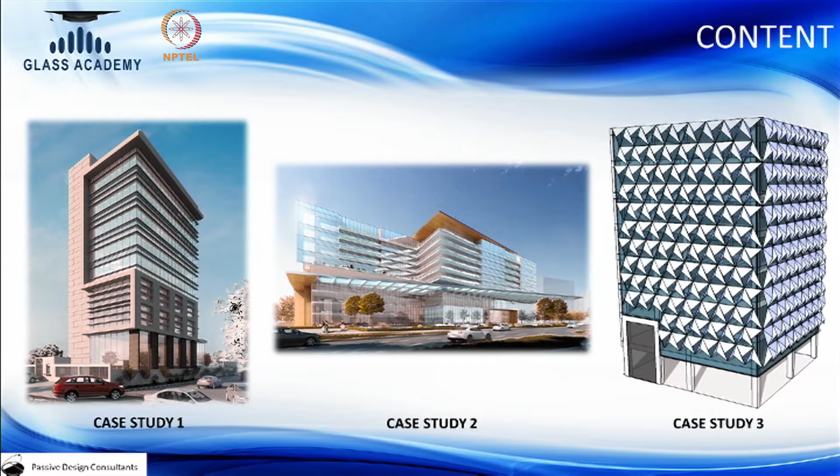Today, I'll be covering 3 case studies primarily. All these 3 case studies are from Delhi NCR region and they are commercial buildings. So, our topic is case studies on high performance building envelope for sustainable building design. And to introduce you to our approach, we begin our studies with first our understanding of the climate, identify passive and active strategies suitable in that climate, going ahead with building daylight integration.

As we are talking about facade, the facade basically has 2 main components, walls and windows. So, the windows have to be optimized for multiple reasons. One is introduction of daylight in interiors of the building. Second is views for the occupants from within the building to the outside. And third, we don't want glare, or we want minimal glare for the occupants, so work can be done comfortably. And in this regard, we also want to make the building more energy efficient.

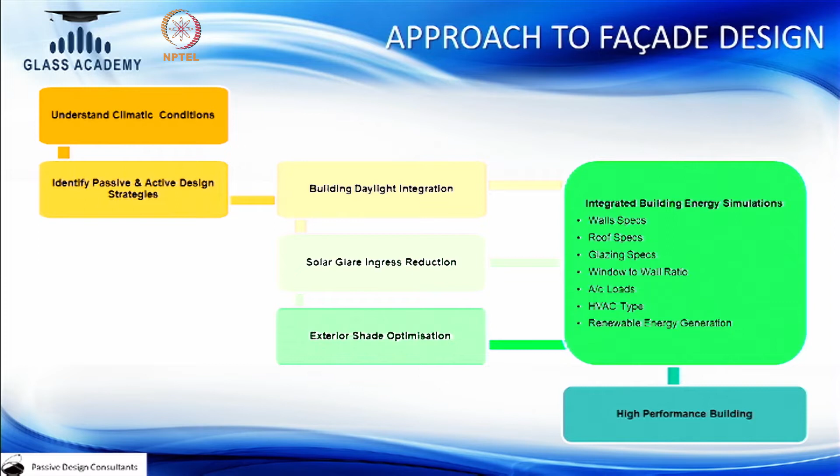So, in order to conduct that, we integrate building daylight with solar glare ingress reduction in the building and exterior shade optimization. All these 3 happen along with integration of building energy simulations for the project, so that we have an integrated design approach. We allow maximum or optimized daylight while preventing glare, having well shaded facades so that the building has minimal energy consumption and it performs well to deliver a high performance building.

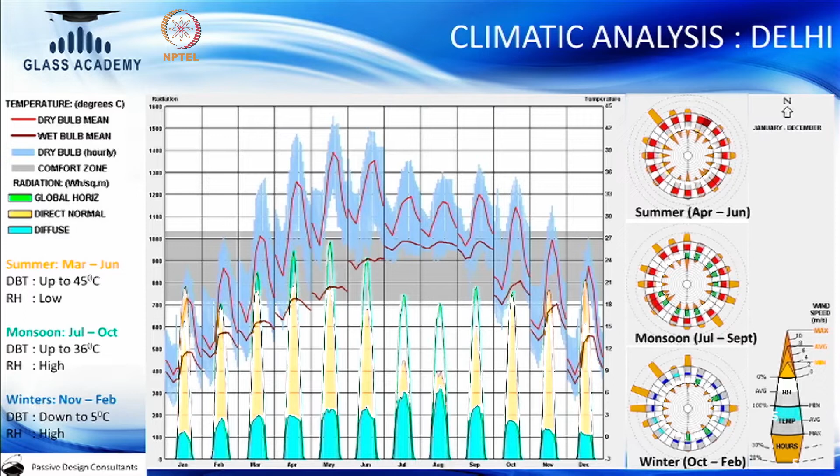To begin with, for these 3 case studies, I'll introduce you to the climate of Delhi. Delhi is primarily a composite climate. We experience all different kinds of climates, like extreme summer where the temperature goes almost up to 45 degrees, monsoon where it gets very humid and the temperature is generally up to 36 degrees, and very cold winters where the temperature drops down to almost 5 degrees Celsius with high relative humidity. Generally, in Delhi, the wind is primarily from northwest. However, during monsoon period, we also get wind from southeast.

Looking at possible active and passive strategies, we derive it through psychrometric analysis. Only approximately 9% period is thermally comfortable by the nature of the climate. For the remaining period, we need certain interventions in building and primarily in building facade, so that the buildings can be made energy efficient as well as comfortable for occupants. So, the major strategies which have been identified for this kind of climate are solar shading, which is applicable for approximately 63% period.

2-stage evaporative cooling, which also helps you for almost 18% period. Thermal mass and night ventilation, which is applicable for 18% period. Mechanical ventilation further enhances thermal comfort for approximately 8% period. And for the remaining approximately 50% period, we do need air conditioning specifically for commercial buildings to make occupants in those buildings comfortable.

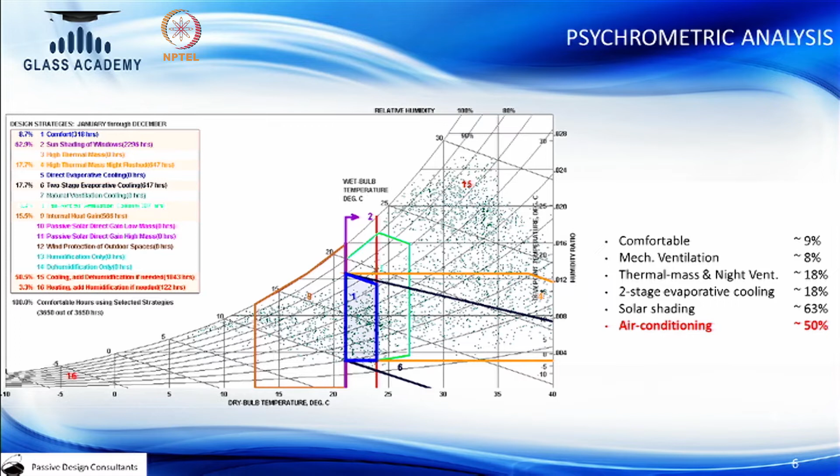To begin with the first case study, this case study is a commercial building which is core and shell, which means that the client was only interested in making the building facade and the core of the building. Remaining things will not be developed or provided by him in the building. A tenant will come and will occupy the space and will install the remaining items. The building is aspiring to platinum IGBC Green New Building rating system. The building is approximately 1700 square meter in total built up area, and has ground plus 7 floors with 1 basement.

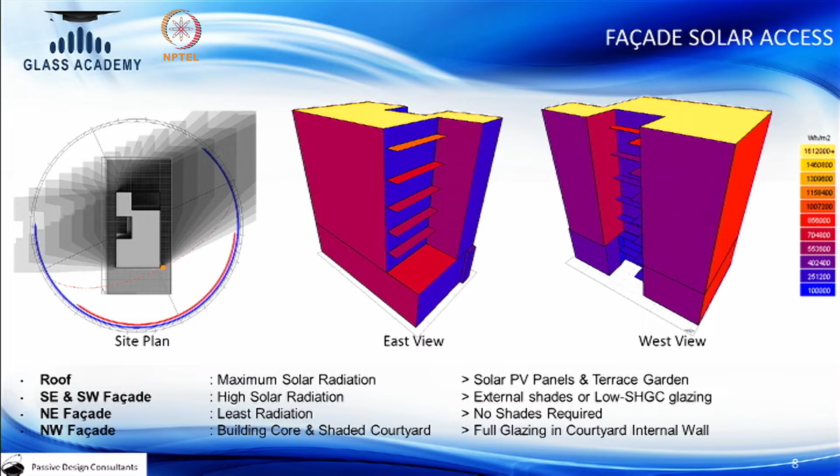On the northwest facade, the building was basically facing the adjacent plot and the adjacent building. So, primarily it was blank, but there is a courtyard facing that direction in the project, and that particular facade, since the courtyard is shaded, could have full glazing.

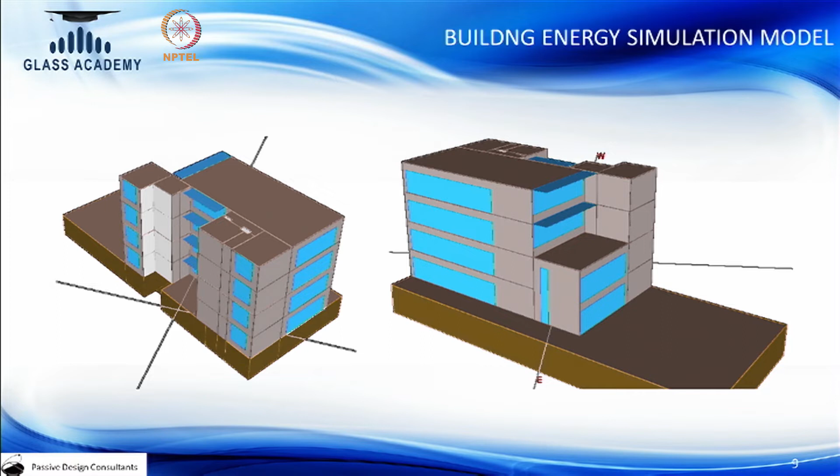Moving on, we developed an energy model for this particular project. These images on the slides show how the model was made, the building geometry and the glazing. You will see that the project has a significant glazing area. It was calculated that the building had approximately 38% window to wall ratio. The window to wall ratio originally designed was in line with the ECBC requirement, less than 40%. So, there was not much that we suggested on the window to wall ratios. However, optimization of the fenestration was more critical, and that has been focused on,

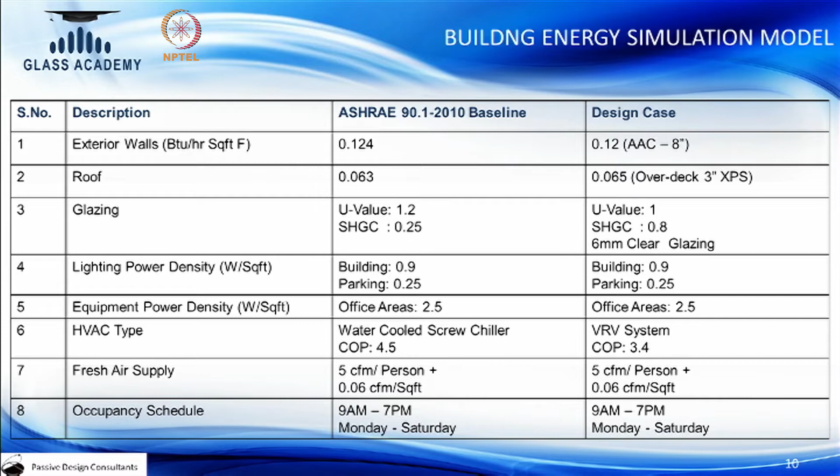and that is what I will be discussing with you. When we started with the energy simulation, we laid down the ASHRAE 90.1 baseline requirements and compared those with the design case already proposed by the architect, and then we went ahead to see what we can further optimize for cost optimization and higher performance of the building. Upon simulation, the design case as proposed by the architect was already saving 11.5% energy as compared to the ASHRAE 90.1 baseline case.

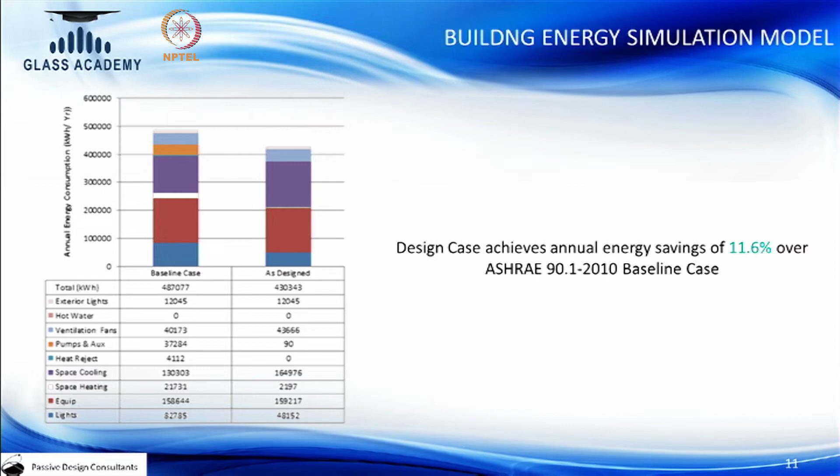So, we started by considering what if the building facade is absolutely clear, using clear glass. The glass VLT we considered for the facade was 80%. The facade did not have any exterior shading devices on the southeast and southwest facades, which are the more critical facades in the project. The glass U value was 5.6 watt per square meter Kelvin, which is for a single 6 mm clear glass.

We realized that with this kind of configuration, we are achieving only about 28% daylit area in the regularly occupied building plan. On the right of the slide is the typical building floor plan. The yellow highlighted area is the office area which will be leased out. On the left are the core spaces like the fire escape staircase, pantry, toilets and the lift lobby. So, we were analyzing daylight mainly in the regularly occupied space, which is the office area.

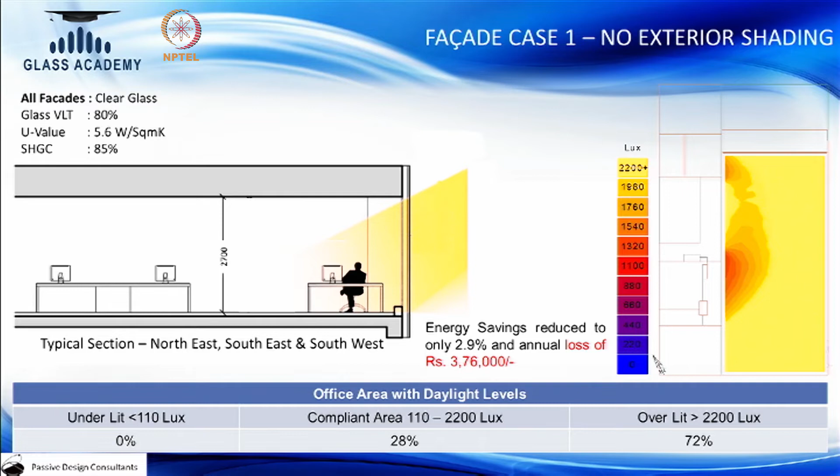As you can see through daylight simulation, we realized that there were 72% overlit spaces, area receiving more than the required daylight, defined as 2200 lux by IGBC. That is what we have considered. More than 72% of the floor plan was receiving more than 2200 lux, which is overlit, and this will greatly cause glare as a problem.

This slide focuses on direct solar radiation ingress within the building, primarily on the summer solstice, equinox, and winter solstice. On all these three typical days, which represent the entire year, the glare was significant from both the southeast and southwest directions in the office space, and this would lead the occupants to use more internal blinds. Using more internal blinds will negate the purpose of having windows, because as soon as we have internal blinds, there would not be any daylight coming through.

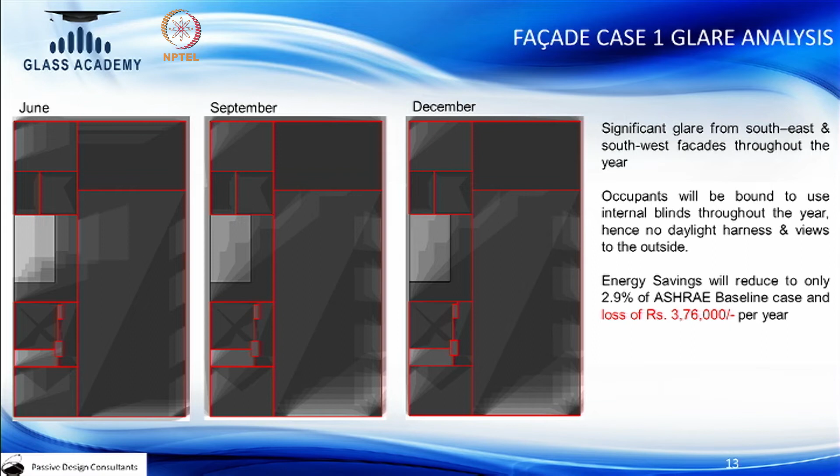In the interior of the building, the occupants will not get views to the outside, and we will completely rely on artificial lighting. So, even though the architectural plan has a good potential to be 100% daylit, because of the glare, we will not be able to use that purposeful daylight.

Primarily through energy simulations, we have analyzed that the project energy savings, which was originally observed to be 11.6%, will reduce down to only 2.9%, and this will equate to almost 3,76,000 rupees of monetary loss to the building occupants for the entire building. So, what is the first approach?

Typically, the first approach is that we go with a single high performance glass, a glass which has relatively lower VLT and a lower SHGC, which reduces the solar heat gain inside the building as well. So, we selected this glass which has 40% VLT, visible light transmittance, the amount of light that can pass through the glass, and the solar heat gain coefficient was selected to be around 40%, U value of 5, which is slightly lower than the single clear glass, but not significantly lower.

With this, we observed that the energy savings in the project would increase to 19.5% from 11.6 originally, and the annual cost savings will also be increased by 3,37,000 rupees annually.

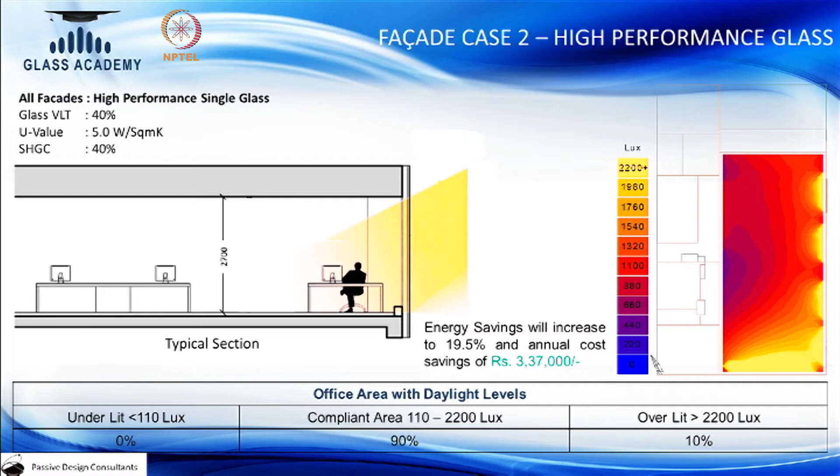Further, on the daylight front, we observed that although the floor is now 90% well daylit, still on the northeast, southeast and southwest facades there is no external shading device, and as a consequence, these people will have a tendency to still use internal blinds, which will not be very helpful. So, we did not settle for this facade strategy.

We moved ahead. We tried the next stage, where we have absolutely dark glass used in the facades to prevent the glare problem for the people who are sitting next to the window. In that regard, we selected a glass which had 18% VLT. As a consequence, the SHGC is also reduced to 23%, which is good for the energy efficiency of the project for reducing solar heat gains, while the U value also reduced down to 3.6 watt per square meter degree Kelvin, almost half of what a single clear glass would offer.

This change on the building facades improved our energy savings from 19.5% in the previous slide to 23%, and the cost savings to 4,96,000, almost 5 lakh rupees. However, on the daylight front, we realized that only 64% of the spaces would actually be well daylit, while almost 36% areas will be underlit.

Underlit are the areas which receive less than 110 lux as recommended by IGBC. Any area receiving less than 110 lux is not receiving adequate daylight, and one would need additional artificial lighting to perform a task comfortably. However, in this case, the overlit areas, or the areas which were receiving direct glare, were minimized to 0%. So, there is 0 glare, but we could not settle for this as the quality of daylight in the interiors was not very good.

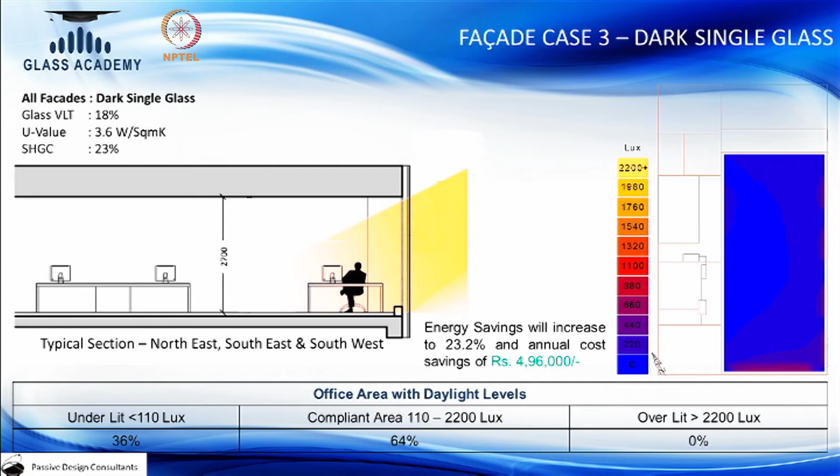We moved on to case 4, where we introduced one light shelf on the southeast and southwest facades. The light shelf was 600 mm deep and 7 feet, or approximately 2100 mm, from the internal finish floor level. With this, we went ahead with the high performance single glass, not DGU. In this case, the glass had a VLT of 40% and solar heat gain coefficient of 39%.

However, because we used the exterior light shelf which was 600 mm deep, we were able to effectively reduce the fenestration SHGC to 31%, as the light shelf is also acting as a shading device and ultimately reducing a certain amount of solar heat gain as well.

What we observed with these results was that the compliant area receiving good quality daylight increased to 96% of the floor area, receiving between 110 lux and 2200 lux. Underlit areas receiving less than 110 lux in this case were reduced to 0. So, there are no underlit areas in the regularly occupied areas in the office. However, we saw that on the southwestern facade, we still have approximately 4% area which was getting more than 2200 lux, and this was found to be direct glare.

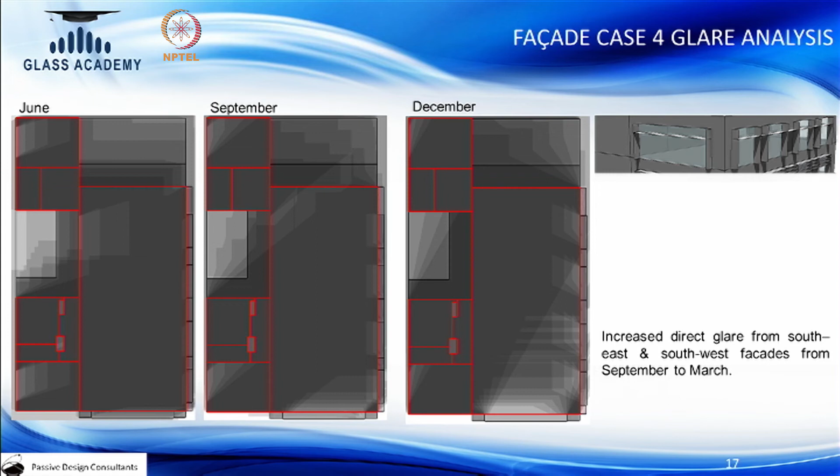Further, we developed another case, a case where we had more louvers working as external shading devices as well as light shelves. However, we will call them exterior shading louvers. With these, the overall impact was that the fenestration SHGC was reduced down to 22%. Only 22% of solar heat will be allowed to pass through the facade.

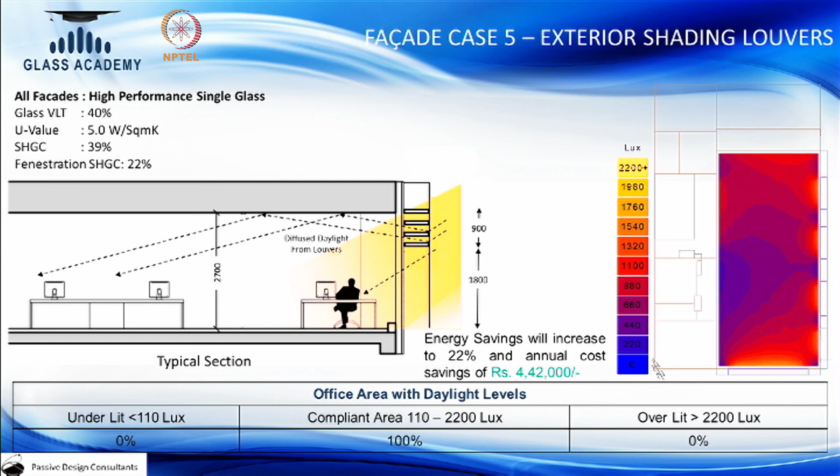The good part in this design was that we had 0 underlit areas in the project and 0 overlit areas in the project. So, there was no chance of glare, while still getting 100% well daylit areas. The client had an apprehension that with so many louvers in the facade, this will lead to a very high maintenance of the facade because of the environment that we have in Delhi, dust accumulation on these louvers and other environmental related stuff.

Validated here in this project through the glare analysis, we saw that there is little glare only in the December month or during the winter season. However, we do understand that for Delhi during this period, the outside conditions are largely foggy, because of which we do not receive too much direct solar radiation, and if there is any direct solar radiation, it is generally welcome in the building as occupants do enjoy it.

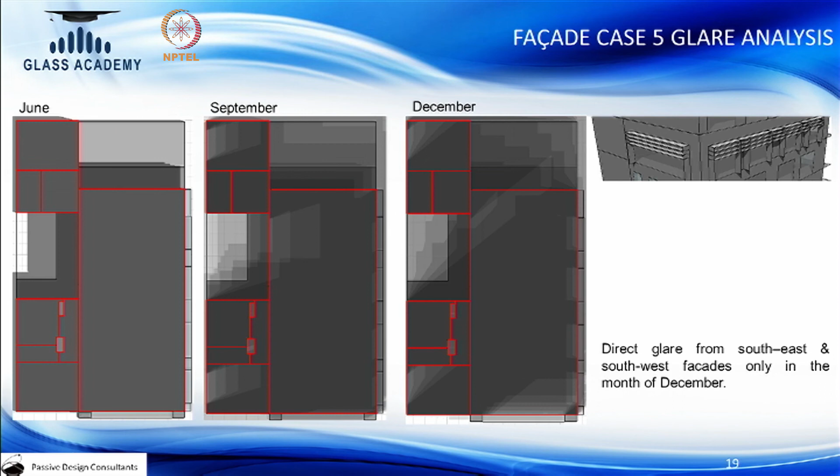So, we can still have that external solar direct ingress in the months of December and January, or in the winter months, while for the remaining large part of the year the space was glare free from the southeast and southwest facades.

As I mentioned, in the previous case the client was still concerned about having too much maintenance of the facade. So, we developed another system where we had double light shelves, one outside the building facade and one inside, so that the maintenance is minimal, as the internal light shelf would not really require as much maintenance. The internal light shelf, however, helped us in minimizing the glare for the building occupants and also improved the quality of the daylight.

What we realized was that now the purposeful daylight, daylight between 110 lux to 2200 lux, was received in almost 97% of the period, while there is still some glare in 3% area. The energy savings dropped down to 21.7% for the very simple reason that the internal light shelf will not help in reducing the solar heat gain. It will only help in the better distribution of daylight, but not in preventing external solar heat gain inside the building.

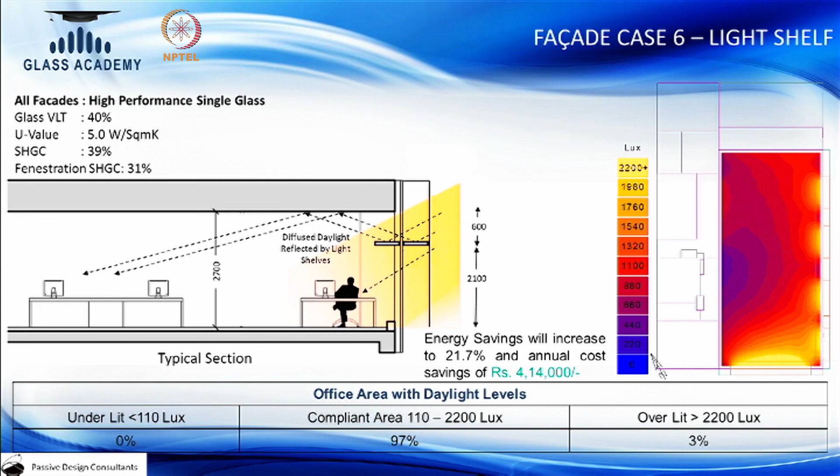As a repercussion, we suggested that the client can now have internal blinds which can be used only during the time of the day when the glare is there, and removed when the glare factor is not there. However, even if we consider a worst case where the internal blinds are kept all the time, because of the light shelves we were still able to achieve good, uniform daylight within the space, with 100% area having daylight, zero glare and zero underlit areas.

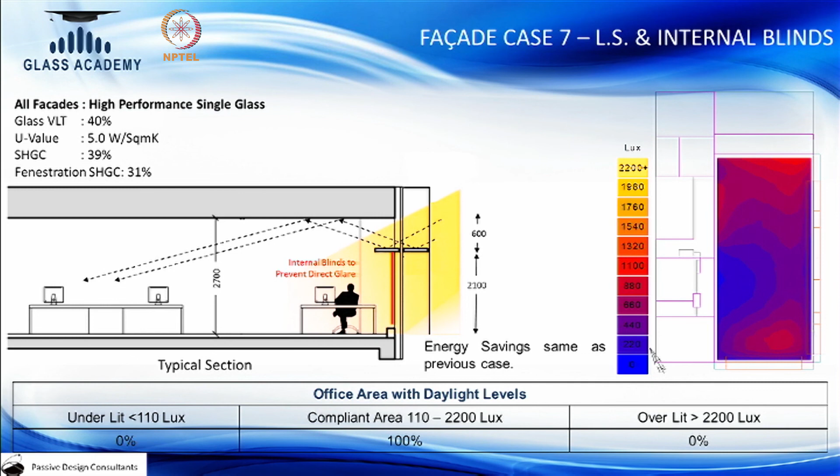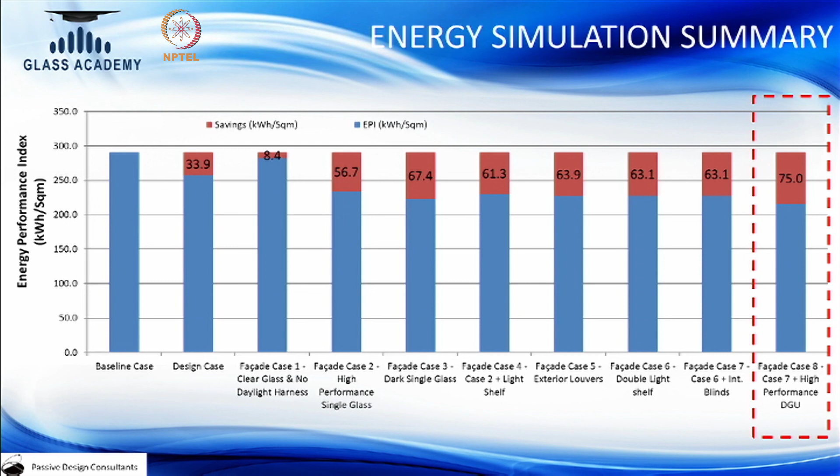As a summary, when we did energy simulation of all these cases till case 7, which was the last one, we realized that the project could save up to 63.1 kilowatt hour per square meter of energy, and that case was only with a single high performance glass. However, for this particular project, if the glass was changed to a high performance DGU, double glazing unit, we could increase our energy savings from 63.1 kilowatt hour per square meter to 75 kilowatt hour per square meter annually, and that was ultimately the final design which the client liked, and we went ahead with that.